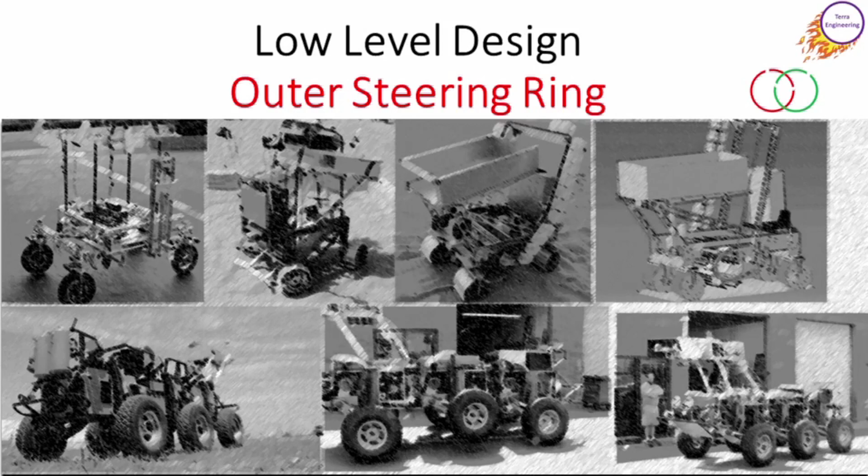This video will cover the design of the outer ring of the steering mechanism. Now, like other parts of the robot, I'm using as much of what I have on hand as possible. That of course means I'm going to be using the 10.5-inch wide by 0.89 inch thick aluminum plates to machine everything I can. But I also happen to have some 1.25 inch diameter Delrin, and these will be used for the wheels that couple the inner and outer rings.

This is the core piece of the outer ring. This is where the motors get mounted and the gearing transfers the torque from the motors through a chain to the inner wheel steering mechanism. Now here is a problem that I really don't have a solution for, and it's a structural problem relative to strength.

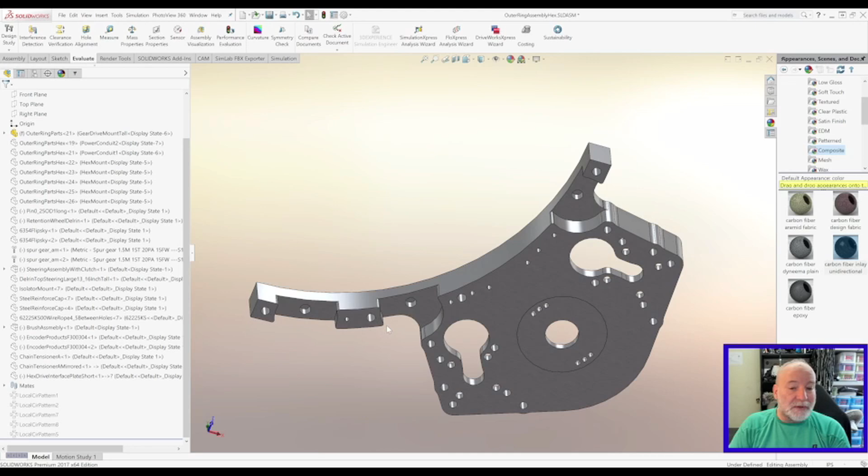Because the plate is only 10.5 inches wide, there's not enough room to have 2 bolt interfaces per side. Essentially, on this side over here, you have 2 bolts passing through to give you reasonable bending strength through this position. A single bolt, it's going to be very weak. I can guarantee you if the system takes a very large vertical shock, it's going to bend right at this interface.

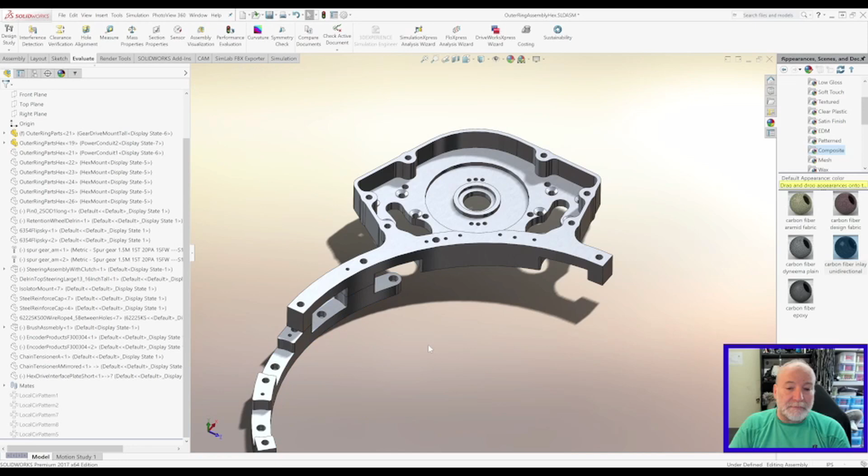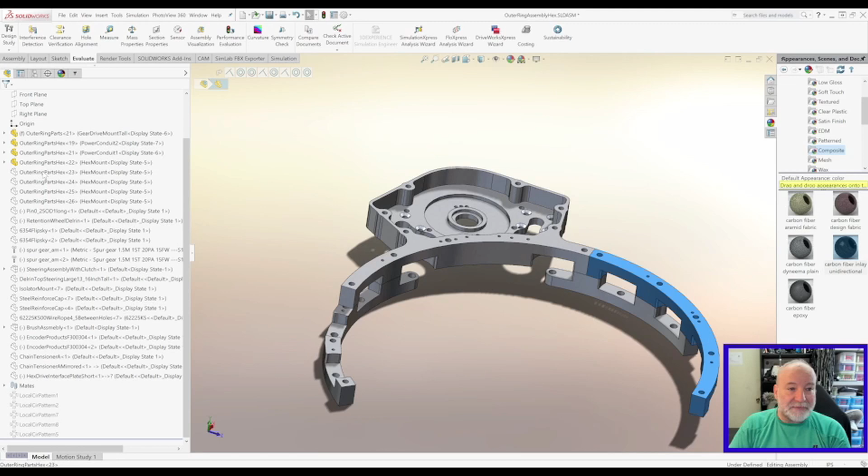This is the next lower piece, and you can see the double bolt locks these two together, and you have reasonably good transfer of load through there. And on this side, not so much. Above, below, and that completes the ring part of the outer ring.

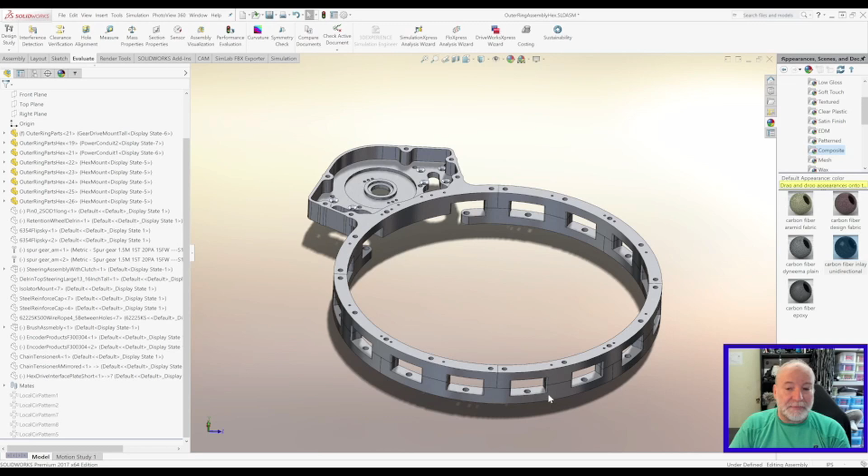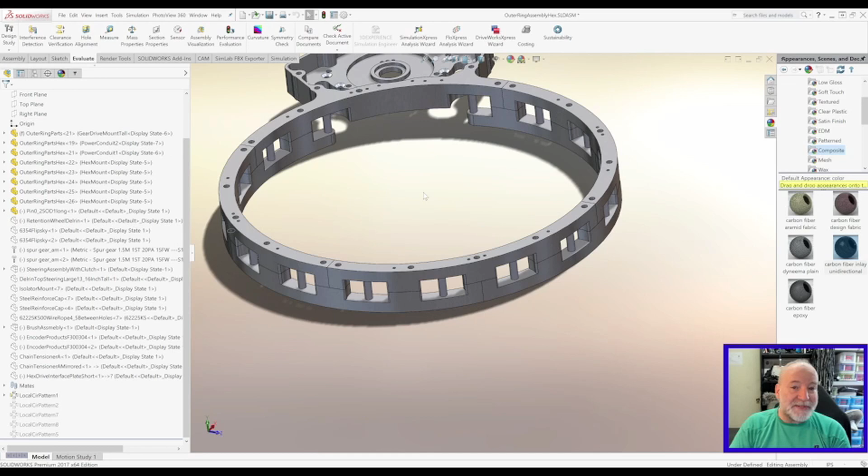Each of these pieces will be machined from the 0.89 plates. Like the inner ring, they can be nested for efficiency and minimum material loss. Sitting in these gaps, you have, in the inner part, a captured pin, 1/4 inch diameter, plenty of load capability. So those pins run in each of 15 locations. Nominally they're 16, but at this point here we're going to have our brushes, so that removed the 16th location.

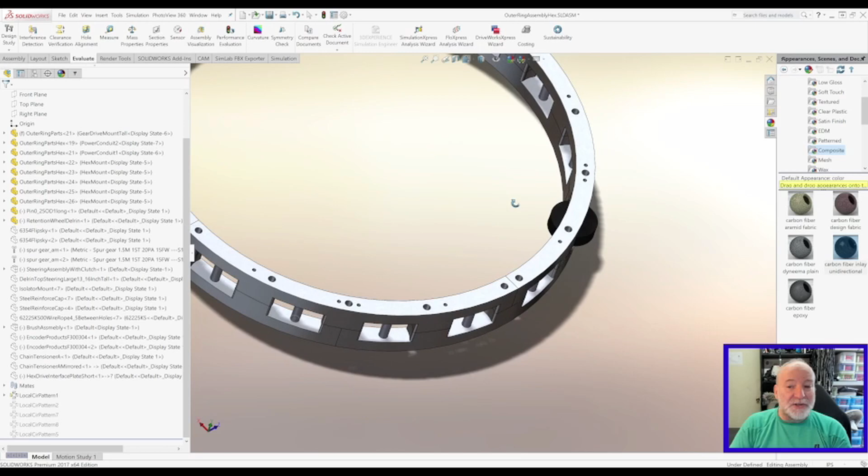The Delrin wheel, 1.25 inch. Notice that it doesn't really stick out much, but it doesn't have to. You want to keep the 2 rings as close to the same size as possible to maximize the shear load capacity. The shape of this wheel fits into the notch in the inner ring.

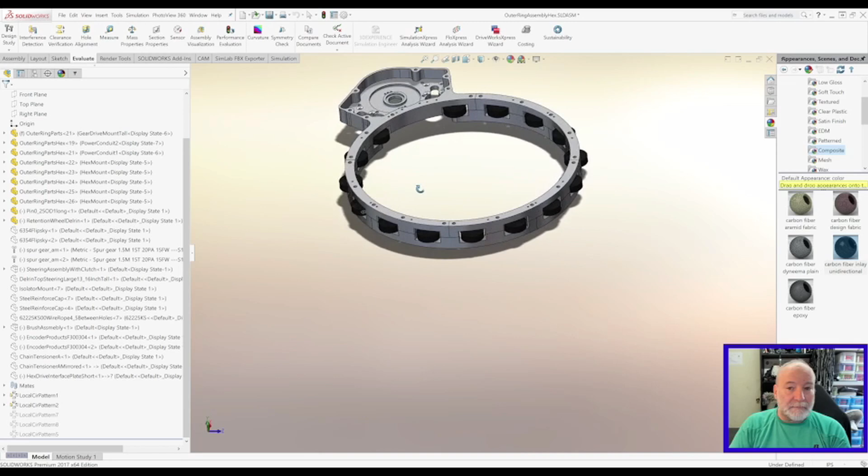This system is built around a fully assembled internal ring. Once it's assembled, the 2 are locked together, and you cannot get them apart unless you completely disassemble the outer ring. The idea is that I'll build up spare sets, and we'll have them on hand if I need to swap them out.

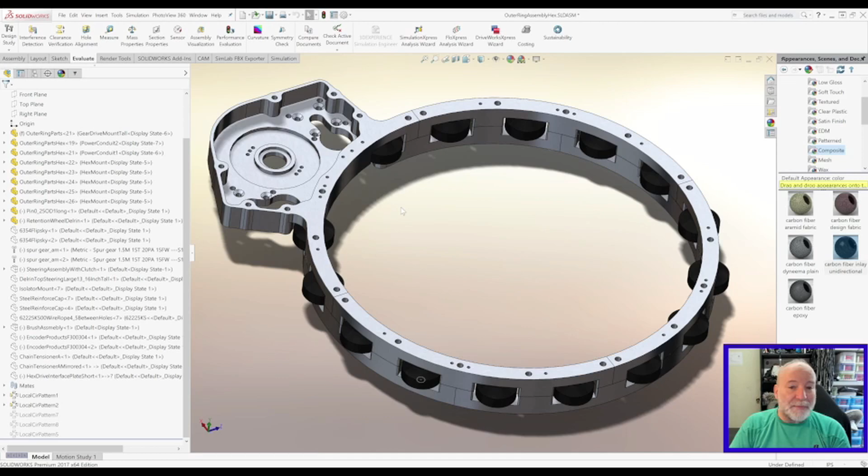Now let's look at the steering drive. I don't have these motors yet. These are 6354s. I don't know if I'm going to have the weight to run 2 motors at once. In some cases it might be more favorable if I end up going just one steering motor. It might be more favorable to have it on the left side or the right side, depending on where the wiring's coming from. So right now the design handles two, as if we can do it in the long run weight-wise, that would be best.

If the system's drive goes down, we can still survive as long as two or even one wheel still has drive. We can still keep going. Once the steering starts going down, the system will go down in a hurry. It'll be very difficult to drive this thing if you can't steer the individual wheels.

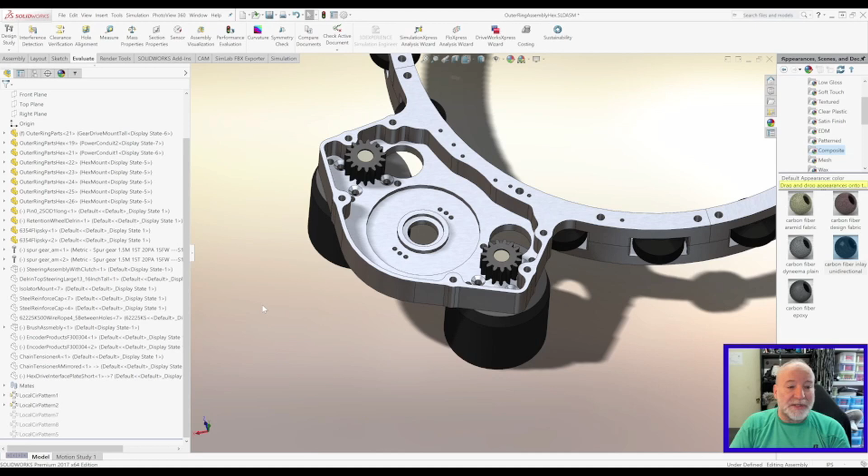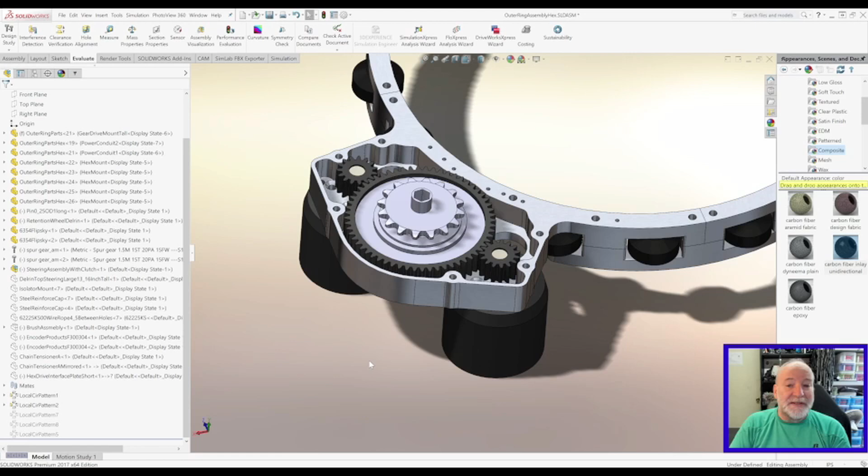Same as before, these are 15-tooth 1.5 module gears. And you'll see it's very similar. I try and keep things with as many parts as possible that share the same size and same redundancy, so it minimizes the different number of parts I have to spare. This is the same type of design as the drive. It's got a clutch system in it with internal springs. The big difference is the output of this is this 16-tooth gear.

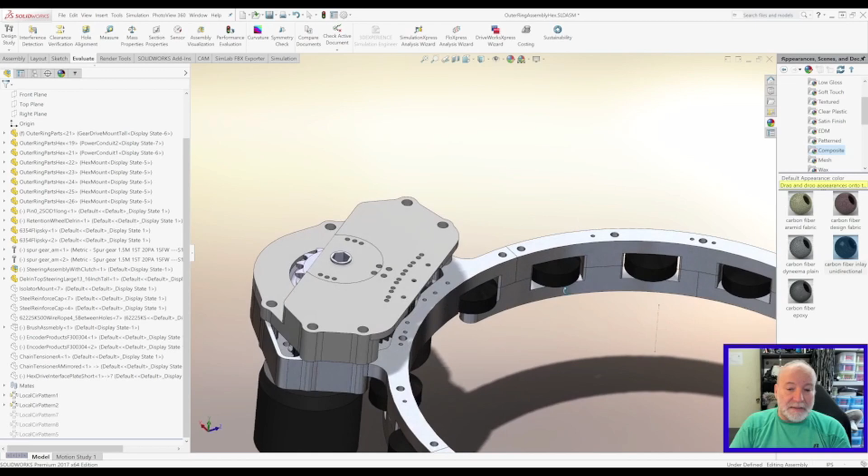This cover I'm going to make of Delrin. I happen to have some chunks of Delrin that are the right size. It doesn't carry that much weight. It makes me be able to tuck this in tightly to the gear and let the chain rub on it. If it's Delrin, it's not going to care that much, and allows for an easy mount for the encoder.

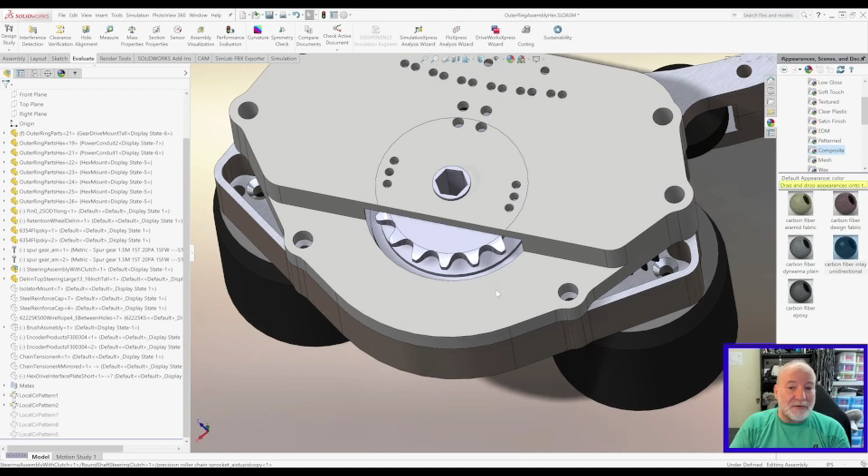There are 3 locations here. I don't know if I'm going to use 1 or 2 of them for the optical sensors for the home position. If I go with spares on everything, it seems to me I need a spare optical sensor.

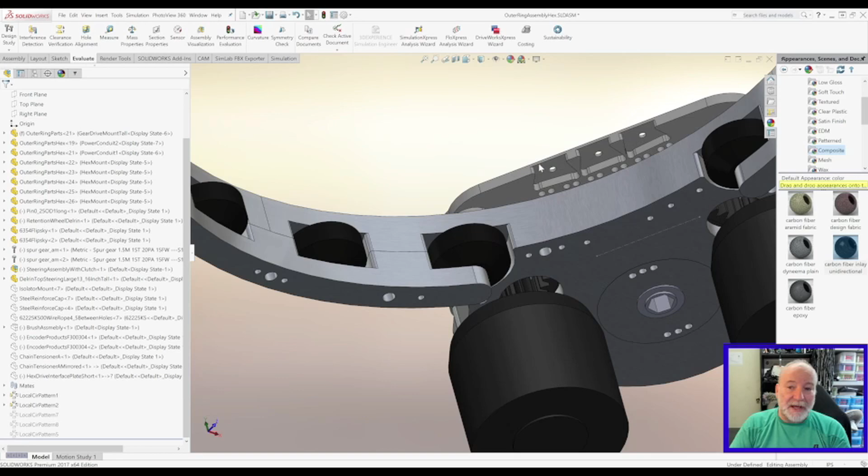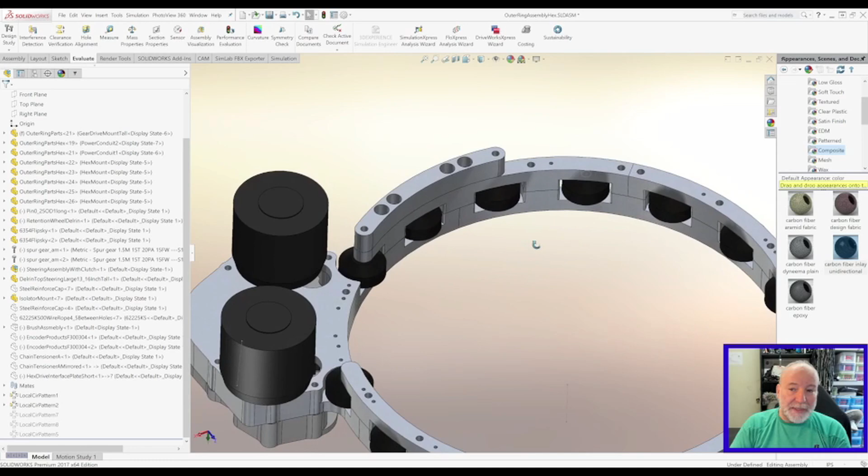These are mounts for the wire rope isolators. I would have loved to have these aluminum pieces cover the gaps, but it just doesn't work that way because of the missing spots here. This missing spot where the brushes go means I had to tuck this in as tight as possible here to keep the system symmetric.

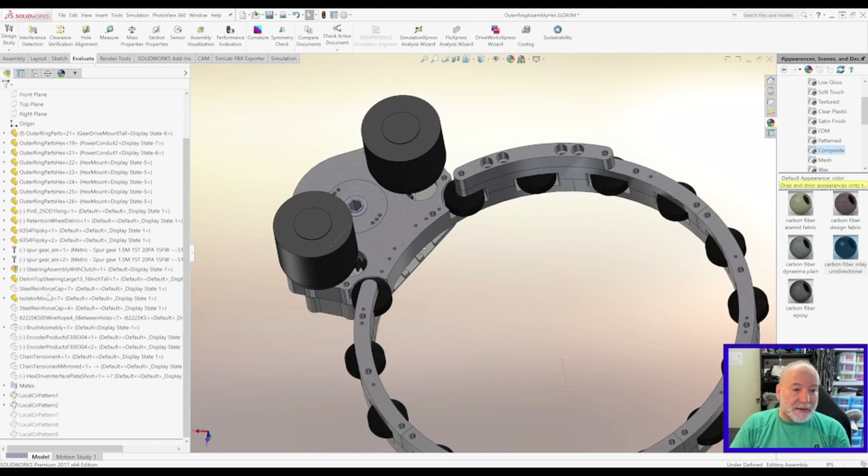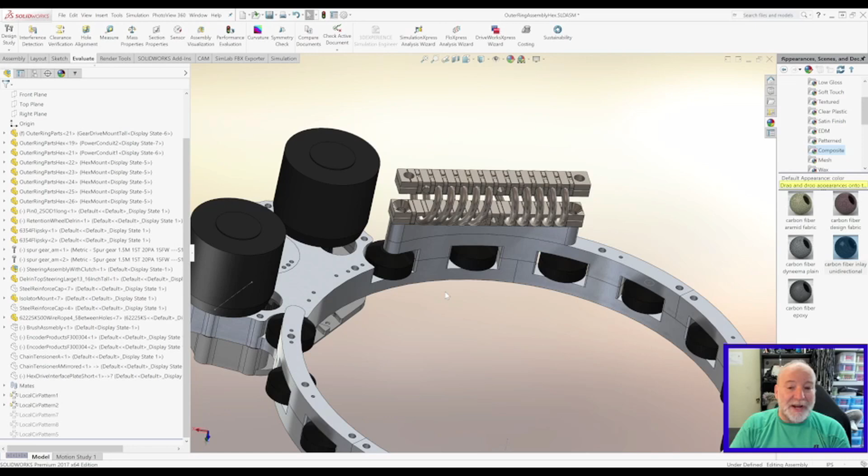Each of those isolator mounts has a wire rope isolator on it. I'm hoping this helps the system survive, because this isolator will limit the amount of shock that the wheel can take. Ideally, if you land and the wheel can compress some, the frame can bottom out, and bottoming out the frame limits the maximum load into the wheel. That's the theory anyway.

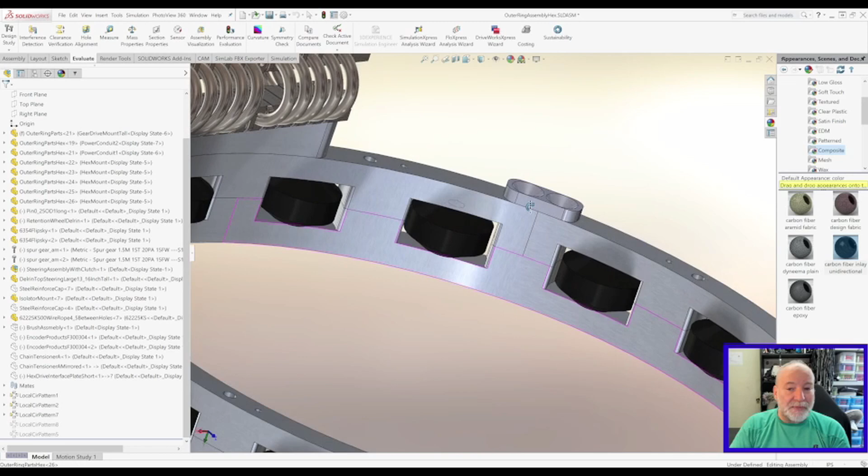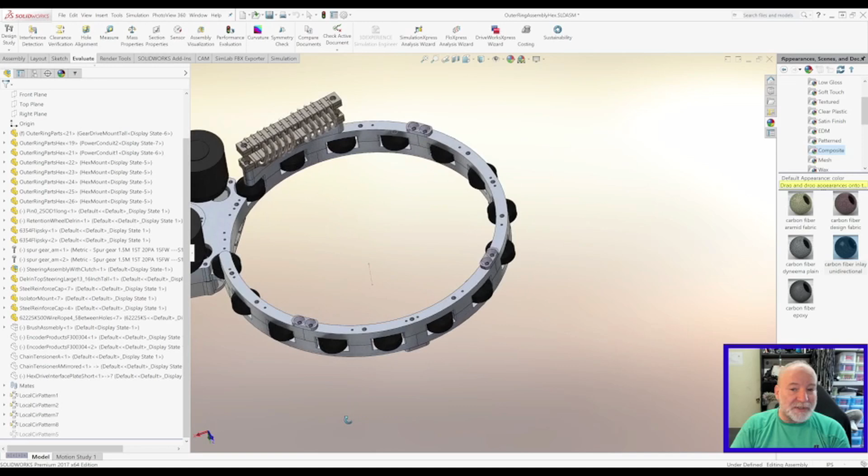There are little steel, basically caps, that I want to put over the gaps to help stiffen them for carrying load. And I put them where possible. Once you see how this assembly comes through, it's not possible to have them at every location. There's our 4 wire rope isolators.

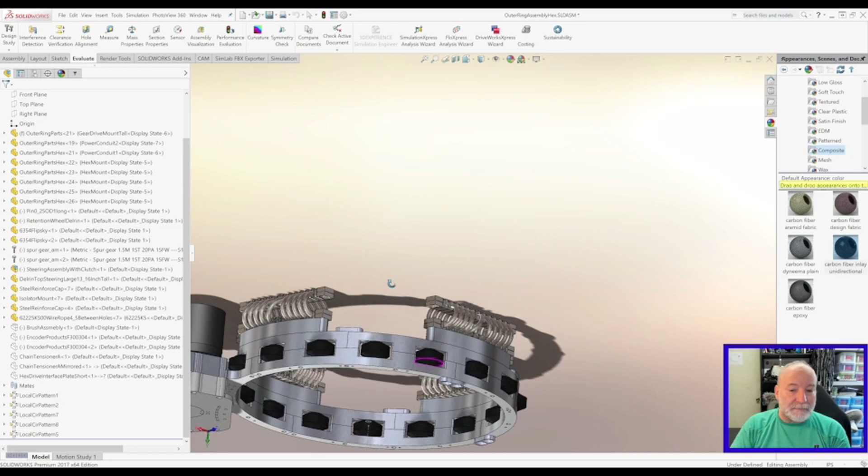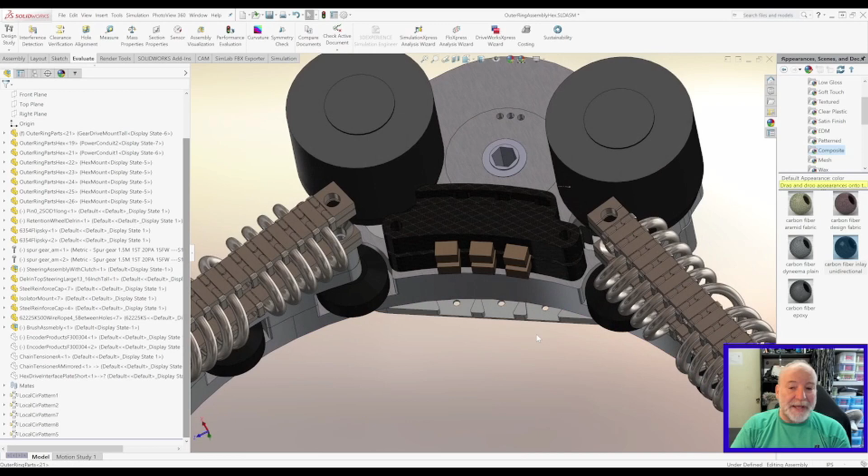To get power across the gap, there is a brush assembly. Nominally, it's 3D printed. I could make it out of Delrin in multiple pieces. It's just going to be rather difficult. Each of these 3 brushes, so the 3 on the top carry the positive and the 3 on the bottom carry the negative. 3 brushes means that if one bounces and comes off a contact, I don't lose current carrying capacity.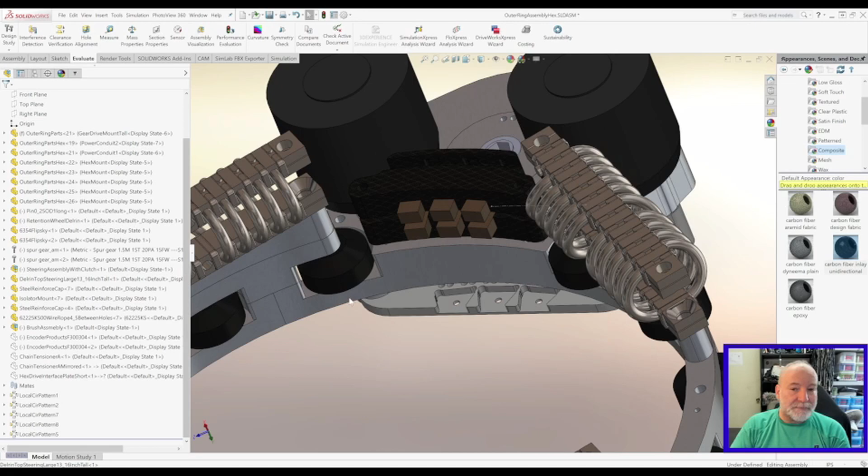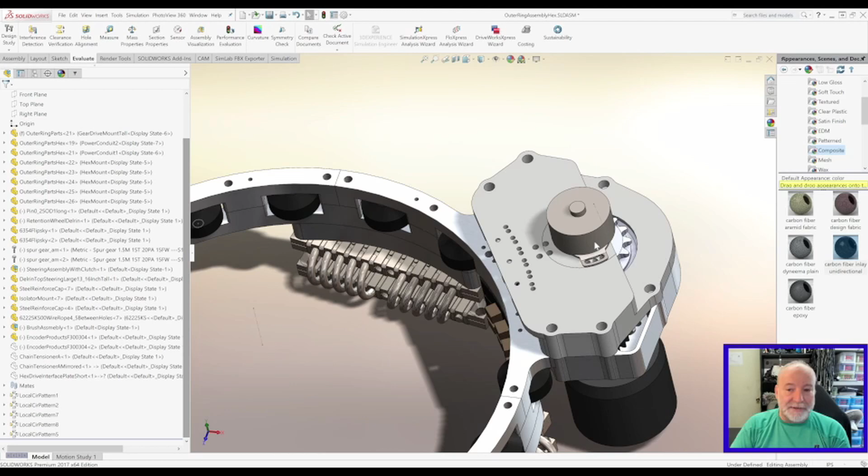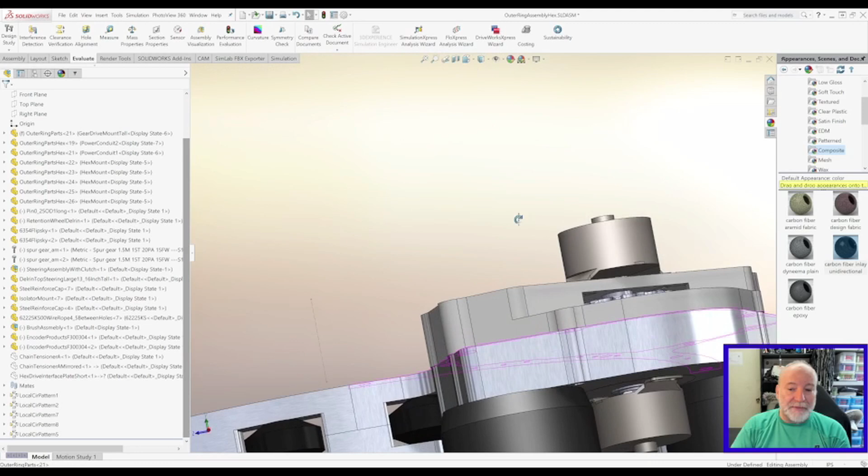These encoders, it turns out that I had 9 very, very expensive encoders that I got off of eBay at least 8 years ago. They are something on the order of 8192 counts per rev, and they're pretty structurally sound. Again, if we go full redundancy on the steering, there's a place for the encoder on the top and a place for the encoder on the bottom. If I only end up going with one encoder, obviously I would cut the one that sticks out. It's the most susceptible to damage.

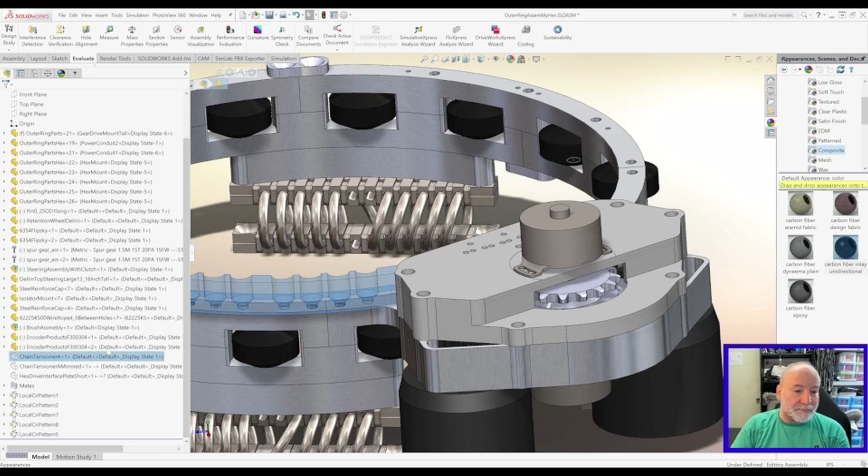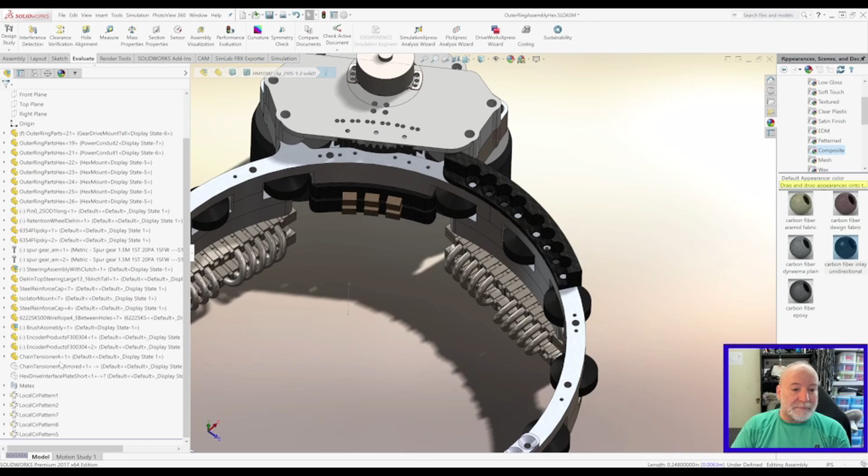This will either be Delrin, or if I run out of time, I'll probably 3D print it. This is a chain tensioner. So the idea is that you set up the chain to be as close as possible, and then as the chain wears in, this can be stepped in one at a time. If an individual step is too coarse, then I should be able to 3D print a half step pair of these. I don't know if I'll have to do that.

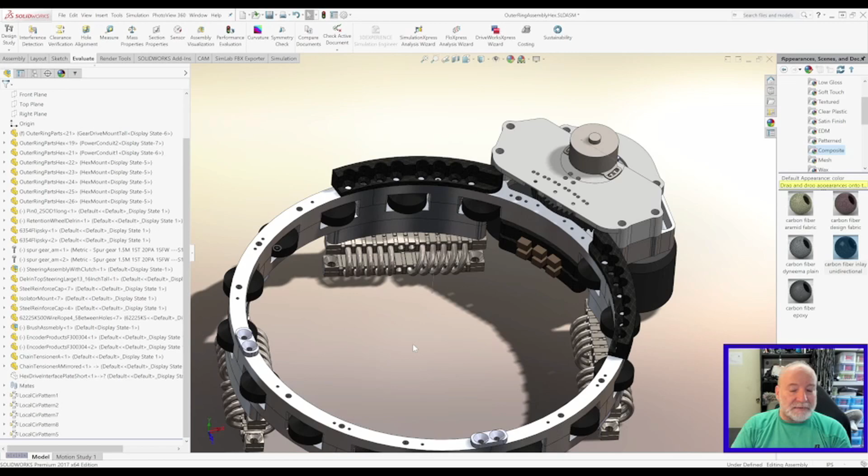This whole system is supposed to run loose, right? It's not designed to run for 10 years. The lifetime of most things on this robot is probably less than 20 minutes. So you really don't have to worry about your gears being perfectly tight, and in this case, these Delrin wheels, you don't want them tight on the inners, because a little bending, a little damage, and they could bind. Make everything really loose. AK-47 design is what they call it.

Finally, the last piece of the puzzle. That's the interface plate. Now that design grew out of the center core, the center hex design, and I'll show that in the next video.